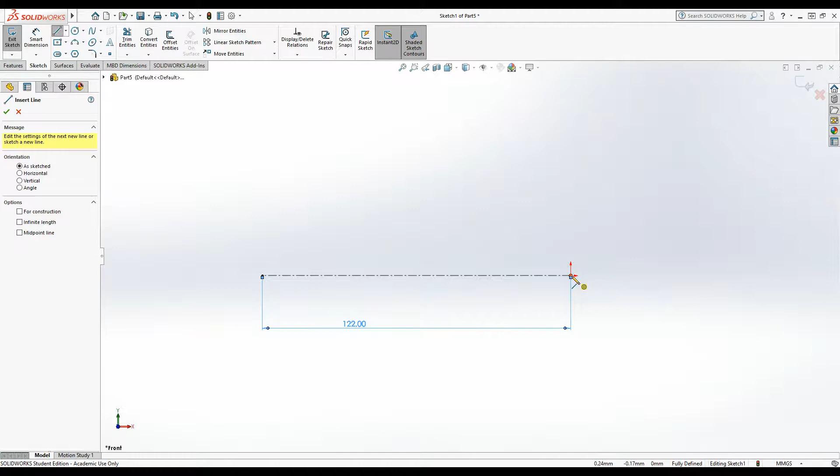Okay, and then I'm just going to sort of freestyle it over the top for now until I've got the different sections in place, and then I'll go back and add the measurements afterwards. So there's a few of these rectangular sections. Just using the line tool, keeping everything connected. See, a couple of these sections are about the same height. Now this bit here, I'm actually going to leave a gap because we don't really know what that angle is there.

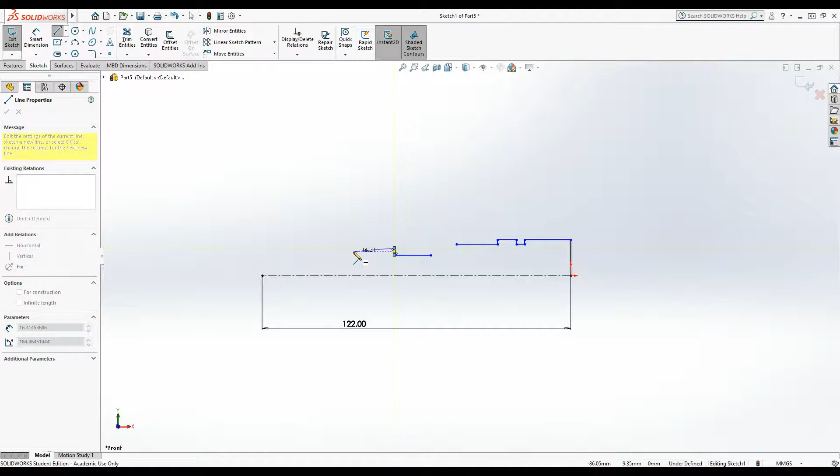Start again with another straight line. And then we've got a raised section. And the final spindle section at the end here. Okay. Two vertical lines at each end mean that the revolve will be capped off at each end. No need to worry about that.

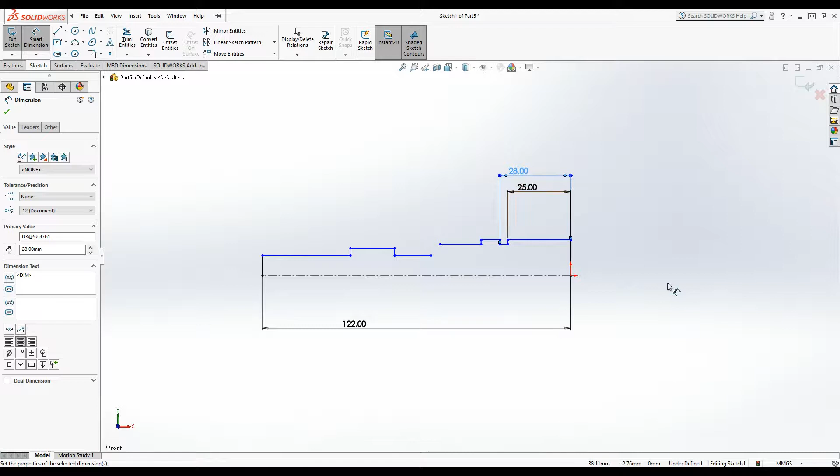So smart dimension. Let's start adding some widths. I've got 25 for the first section. 28. Notice that everything goes from a datum point. It all starts at one end of the model. 50 mil. Nope. 35 for the next bit. Then 50. Okay, 55. 72.

And then we're not given a straightforward dimension for this next bit. However, we are given two radiuses for the curved section at the top. We take the difference between 20 and 45, leaving us with 25. So this line here is just going to be 25. Okay. Connect up the gap that I left just with a straight line, and then we can set some of the radiuses here for these sections. Okay, let's have a little look.

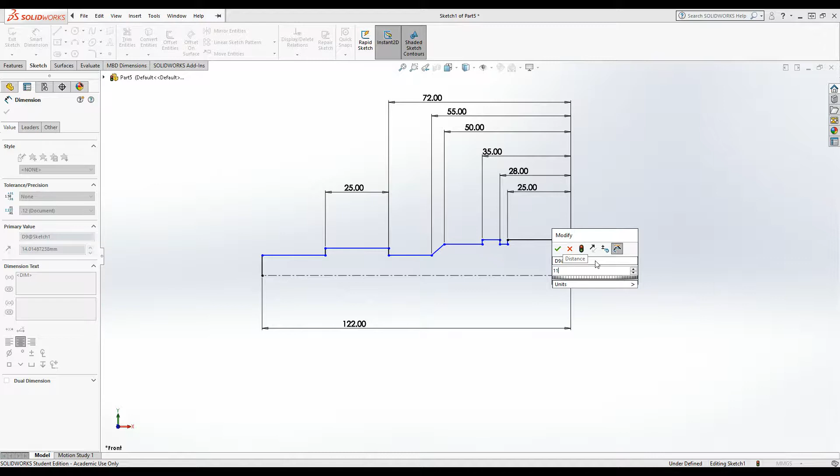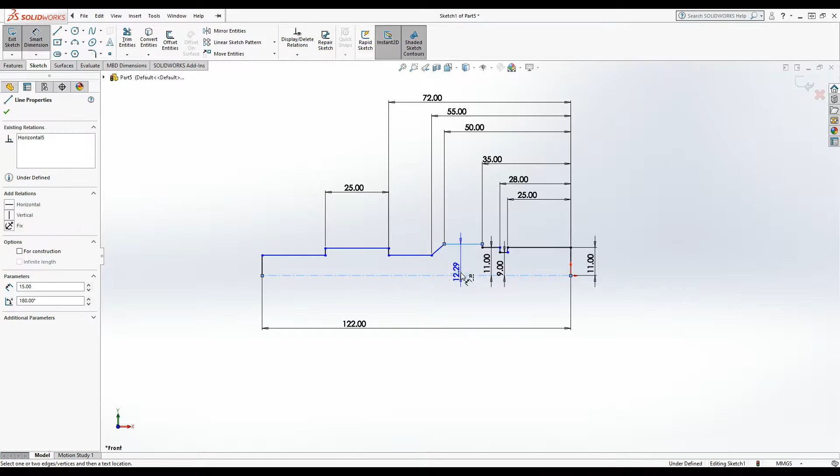So 11 for the first section, remembering to halve the diameters that are given on the drawing. Okay. 9 for the next section. Okay. 11 again for this bit. Okay, try again. Back to 9. I don't know why it's doing that, it's a bit strange. Let's try again. Okay, 6 for this bit. 7 for the wider section. And back to 6 again. Sorry, 3 mil.

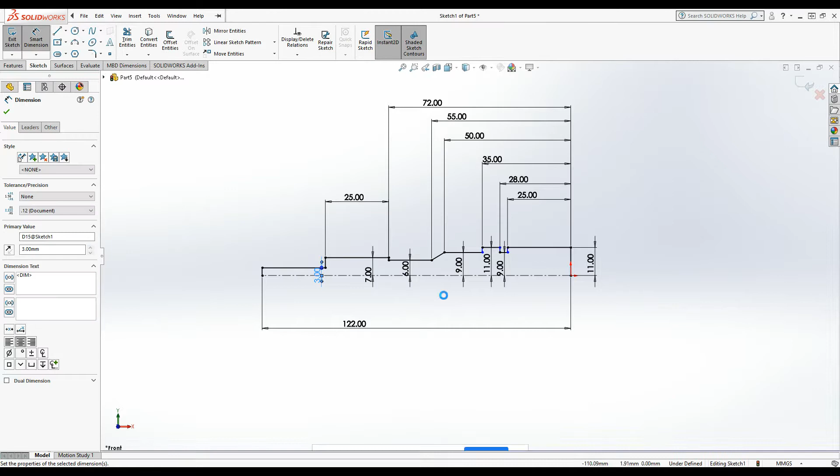Okay, we could chamfer this corner here, or we can do it later. I'm going to do it using the sketch tools, so just drop down the sketch fillet and choose chamfer. The size of the chamfer is 2.5. You can see that in the notes of the drawing. So 2.5 mil, and then just click on the corner point there to chamfer it off. Looks a bit of a mess, but it's done it. Okay, green tick to accept.

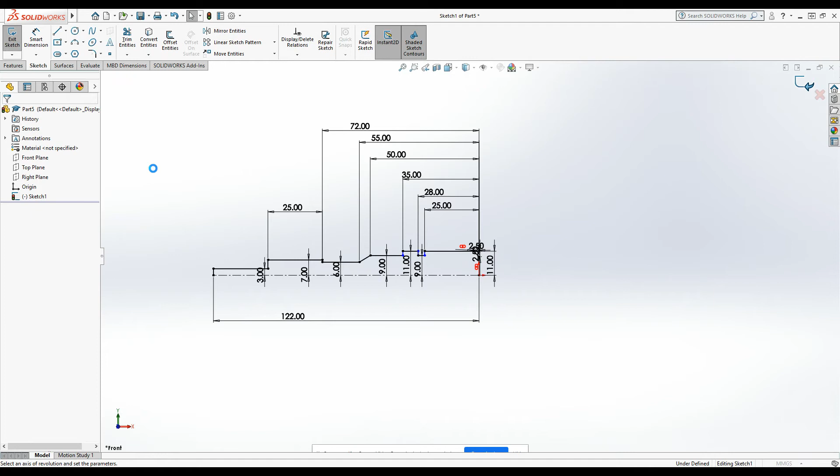Exit sketch. And choose the, oh, it's already guessed it. Okay, good. If it hadn't, you just click in the axis of revolution box here and choose the center line. 360 degrees, green tick. Okay, so the main spindle is complete.